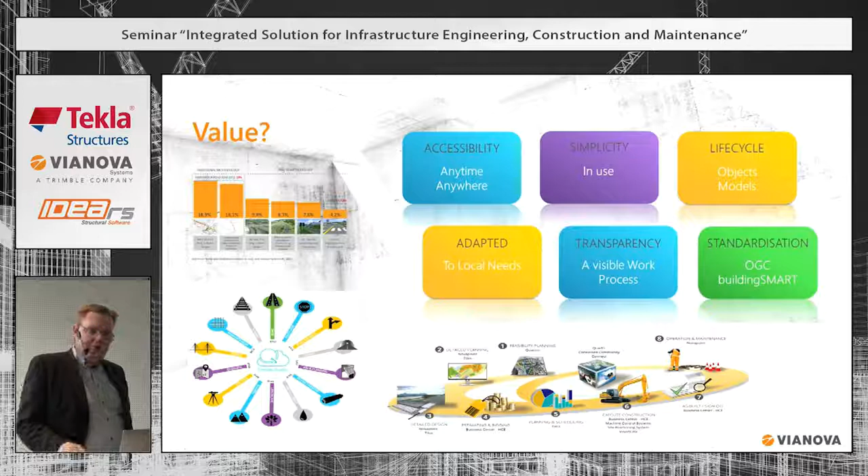And of course, the transparency, that's what we have discussed a lot. That has also been difficult in Finland, this transparency, because lots of work is based on hour rates. You buy hours per designer and that kind of thing. So if it's very transparent, then you are afraid that the customer uses that the wrong way. And of course, the standards and these kind of things.

So the BIM server and this collaboration platform, Trimble Quadri, is what we talk about today. What is good there is that when everybody is in the same model, you have this integrated process. So everybody has to do things the same way, with the same structure. And also all the terrain and GIS information is shared. So if someone finds out something or changes the terrain model, everybody gets the change. You don't have to copy and send files, for example.

And of course the design information. In big projects you have several designers, and you don't have to have these kind of windows where you put the drawings and check if those are clashing. You can do it in the model. It's more efficient that way. And of course, in the corner you have these common rules and regulations, requirements to make that happen.

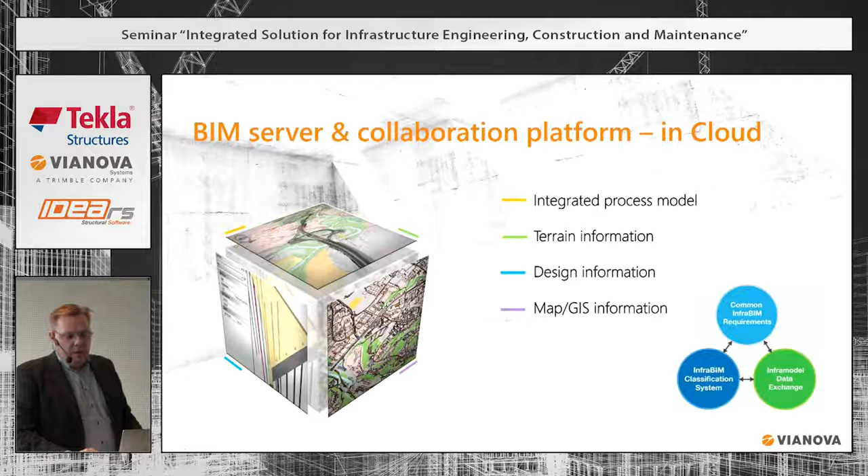But the most important thing, as you maybe remember from the beginning, is that we have this common documented way to do this. So we have these requirements and naming rules and regulations. And I took something from this website: planning a model-based project, you have to plan how to plan. So, sounds weird, but very easy to do.

And also this modeling extent and level of accuracy, because you have different types of information. You have this general information, large-scale maps and terrain models. Then you have very narrow and very detailed models, and to merge those, you have to know where it's coming from, who has done that, and what is the accuracy of that material.

And of course the goals. We don't do the modeling because it's cool or fun. Even if it's cool and fun, it's also cost efficient. That's the case here. And of course the process description, the actors, cooperation, the data exchange between actors and schedule. So every model or every object that you model, there has to be a reason and target and the schedule.

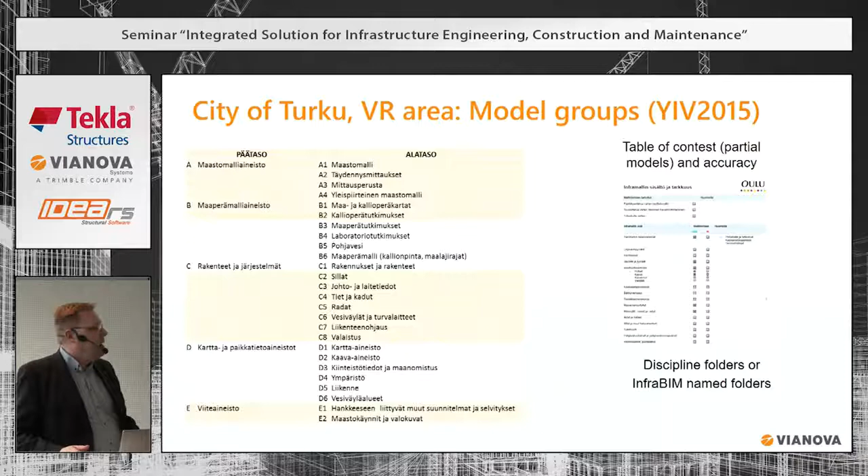Why do this? I'll try to make a demo now, and it's not as good as what Martin made, but hopefully you can see that. I have to change the screen. Okay.

So I have here a point base. It's connected to the Quadri database, which is cloud-based. Actually, I'm allowed to use only the viewer in our company. Martin can edit, but I don't have that kind of right anymore.

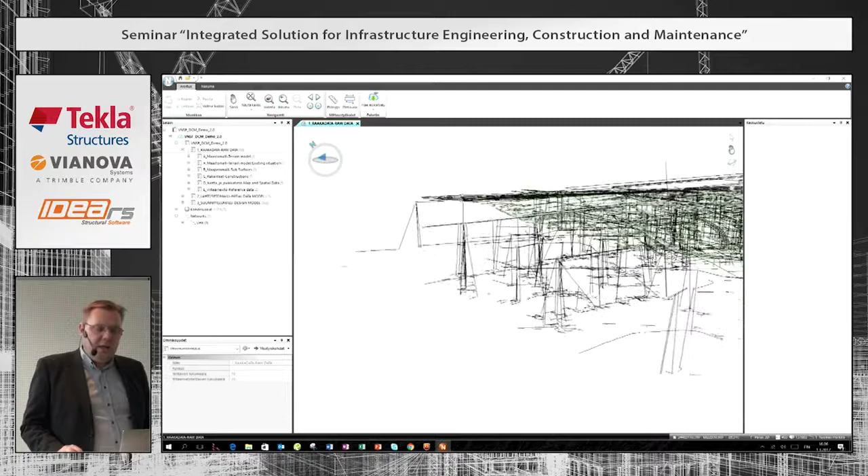As you see, it's quite the word what Martin said. So it's a lot of 2D, 3D material, and things like that. And this data is now on the server which is owned by the client. So the client collects the data they have. They can offer

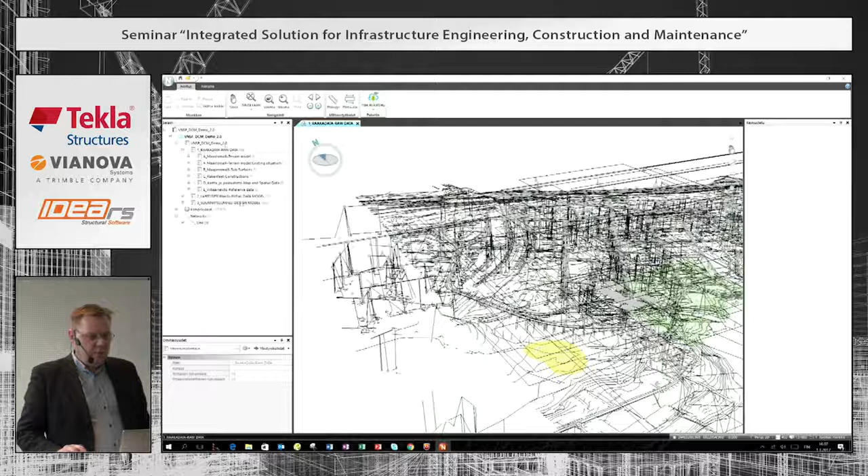someone to make an initial model. The initial model, you understand what this is. It's a base model where you clean all the 2D information and so on. So basically you share this information to all who are making a tender, and they are able to use the material to make an initial model. When it's clean, it looks like this.

So you have a city model where you have houses, you have boreholes, you have a city plan, and it looks a little bit nicer than this one. So it might be much easier to start design with this material. And in Finland many cities and also governmental maps are available, you are able to use those. So we can take also an orthophoto here, so it looks more detailed.

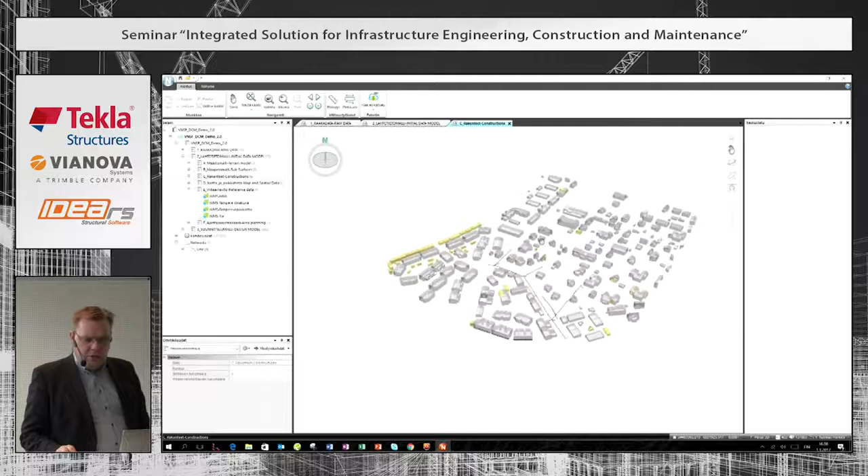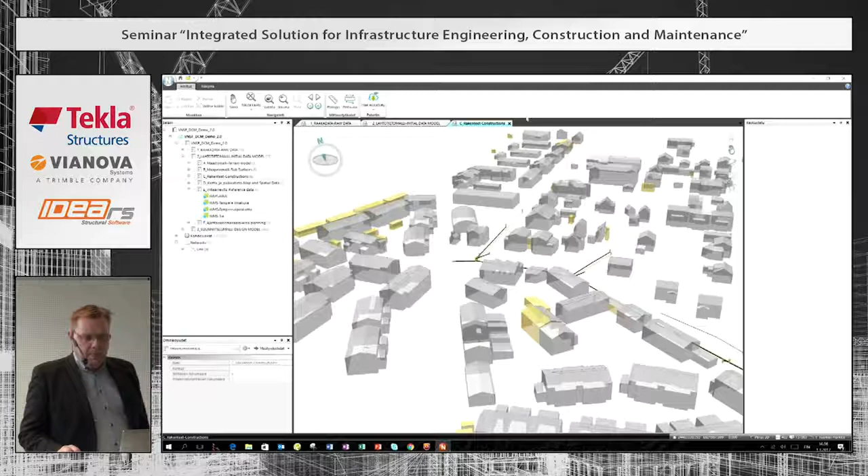So when you have the structure, it's very easy to show what you have. It's very easy to compare. If, for example, I want to see only structures and constructions, I can just open it and it shows that all the structural models are here. So you can piece by piece open the model and you can choose what you want to use.

And of course, now you have the initial model, you have some GIS information, and these are connected to the one model. Now you are able to share this data to designers, asking them to offer their design work. And then you can say that if you know there have to be some extra investigations, please include that in your offer. So you get better offers, and also if you are making the tender, you can take a print screen, for example, and show that there are some mistakes in the model.

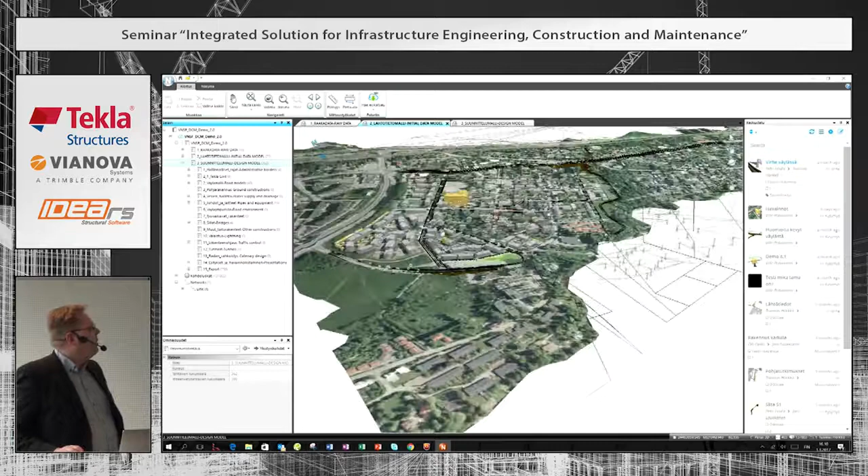If we go to the next phase, we take the design model, which is ready over here. As you see here, it's only design material. But of course you can also open this window where you have this data, and we just drag and drop the design model. So actually then you have quite a good visual model in there to show. So there are some mistakes. This is why I'm not able to edit anything anymore.

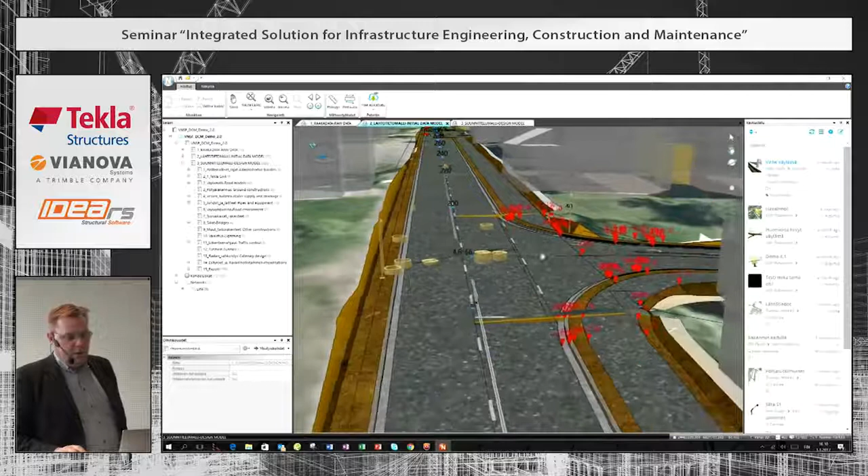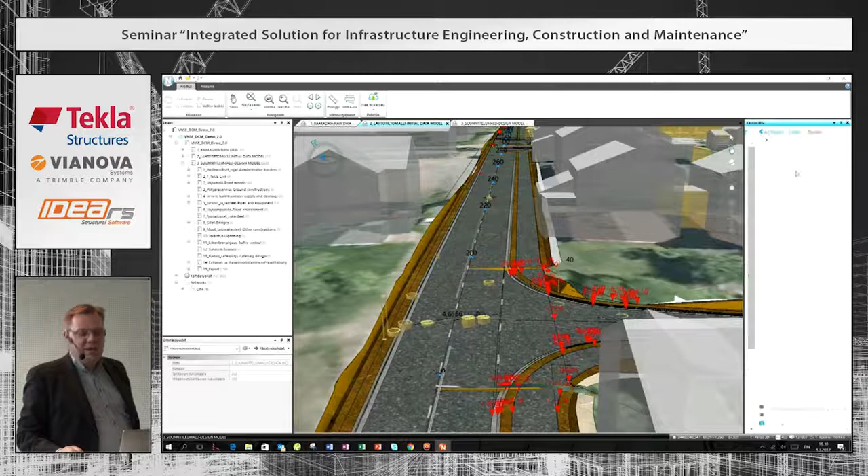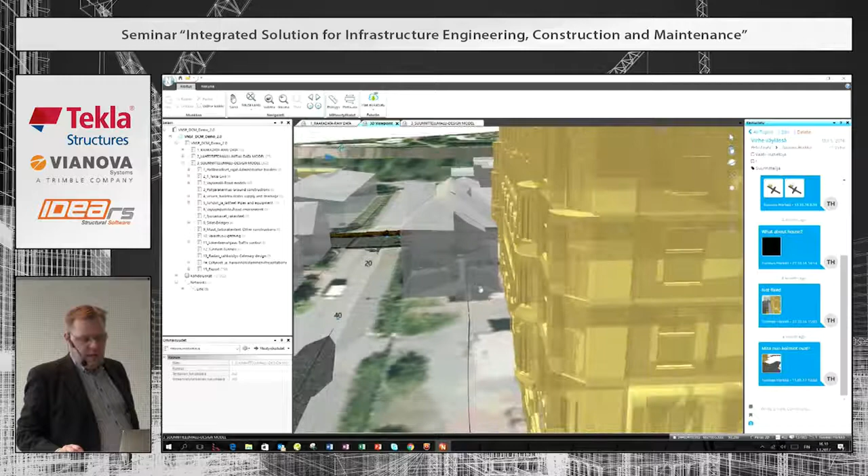So you can see that the process is very open, and if you now ask a tender from a contractor to build this project, the contractor can make his opinions and prices on these kinds of things. And on your right side, here is what we call Facebook for designers. So actually you can store data over here, if you want to see something, and you can give comments and that kind of thing. Commenting tool. Comments, yeah, tasks.

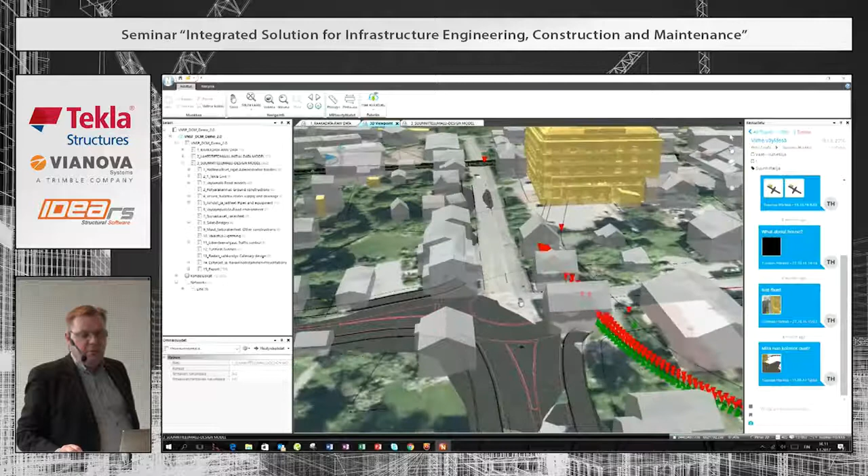But I must say that this roundabout Martin has done, I think you are also quite near to losing your user rights to this project.

But when we discussed how to get the IFC and LandXML in the same place, actually this model, this roundabout, and this building: this is an IFC model, this is LandXML from Tekla Civil, this is native Novapoint material, and as you see now, it's quite easy to go there. The only challenge maybe here is that this is LOD 4, so you have too much detail for a street designer. Actually, LOD 2 is good enough, so you have only the outer geometry. LOD is level of detail.

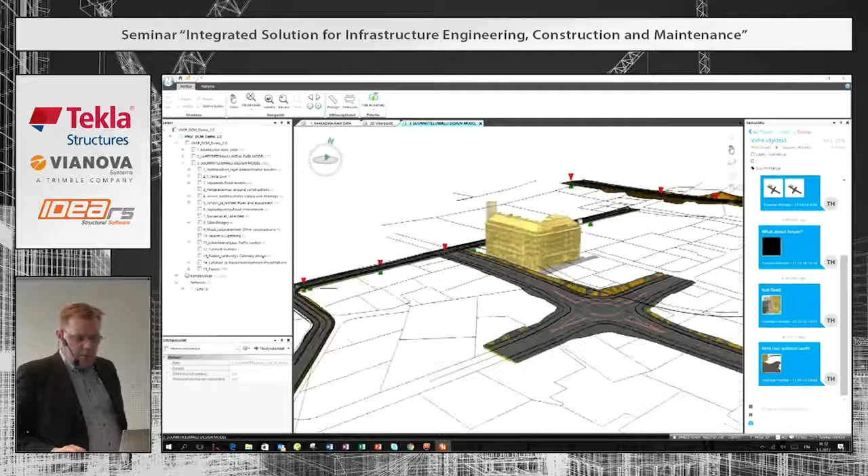So also you can have bridges over here. I shouldn't show this because you are bridge designers, but we don't build this. This is only for demo purposes. Don't worry. So you can add those also. This is done with Novapoint Bridge, which is just for sketching, not for real design.

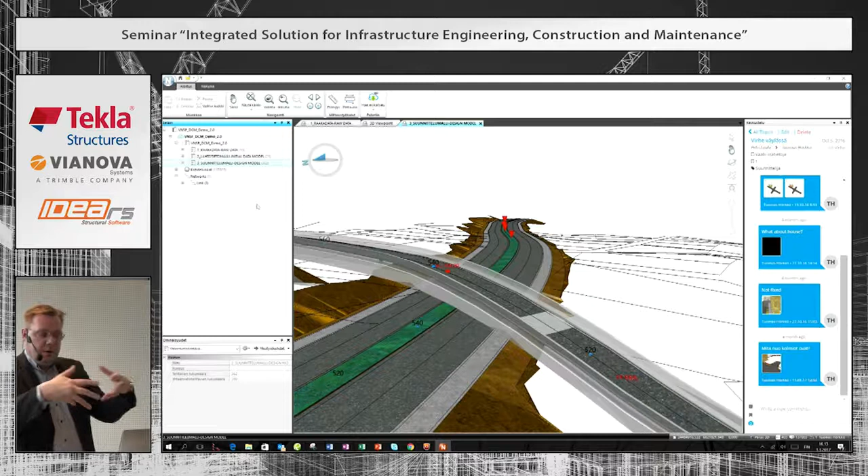For our customers, how they use this data: they use this database as a storage place. They use it for sharing the data between different designers or contractors. They are also able to ask for tenders so that the road or street designer makes their own offer, and the water and sewer designer makes their own offer. But those designers can use both data online all the time. So you can also split

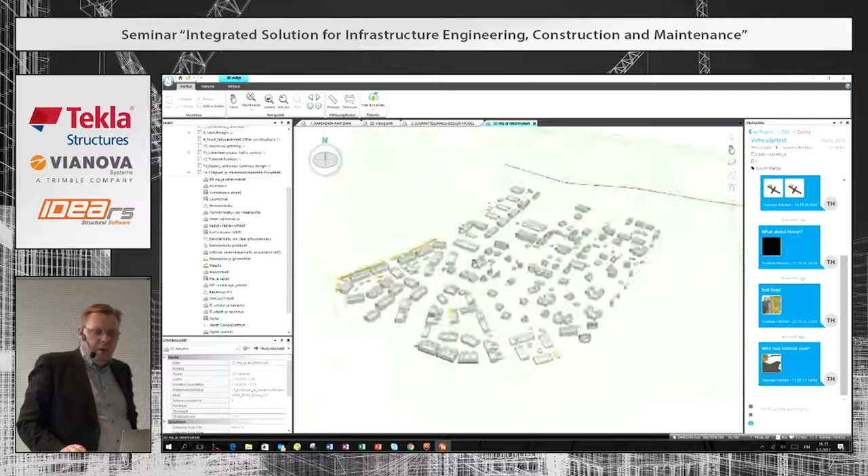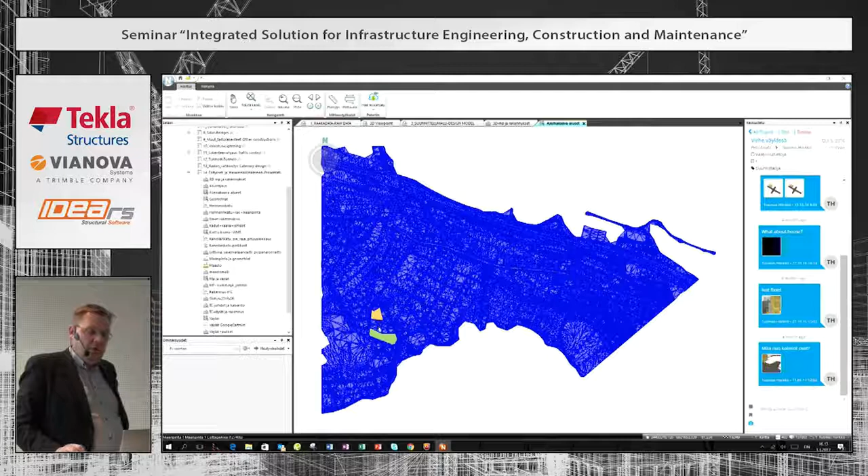in that sense. Also, we have presentations here, so you can make presentations that are ready-made. Normally when I make a demo, our guys make ready-made presentations for me, and I just show certain layouts, because it takes too much time to do it myself. But here you can see that if some design part is under discussion, for example this intersection, then you can just concentrate on that and make a presentation, and the designer and the client can have a discussion without meeting each other.

And also, you are able to do this in web. So we have this Connect, and then we have this easy access. The easy access is similar to Connect, so we prefer Connect in that sense, because then you can add richer data there, like Martin told, so you can put all the PDFs and Words and Excels and things like that. So it's like a project bank.

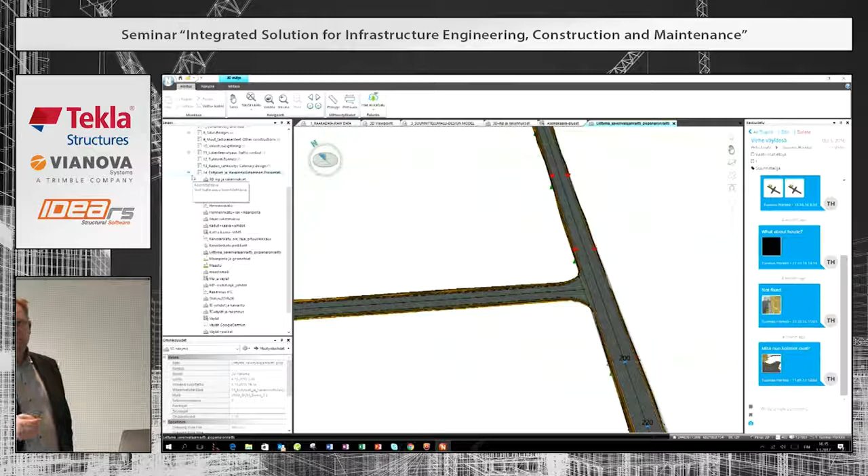And as Martin said, we have online and offline, so here also you are able to make it offline. So you can just grab it with you, and then you just click over here to ask, is there any new information? And then it connects to the server and searches all the changes since you last loaded the data.

This makes it possible to make a digitally fixed version. For the client, it's always important that when they give something out, it's the same version. All contractors have the same version when they calculate volumes, for example. So this helps that you can lock the version, for example, or deliver just the packages, which helps a lot.

Okay. Maybe the most important thing. Just to be more clear, this software is like a server of everything. Yes. Who is the owner of this software? What is your practice? Is it the road contractor or what? Yeah, the road administration or city or municipality has their own server.

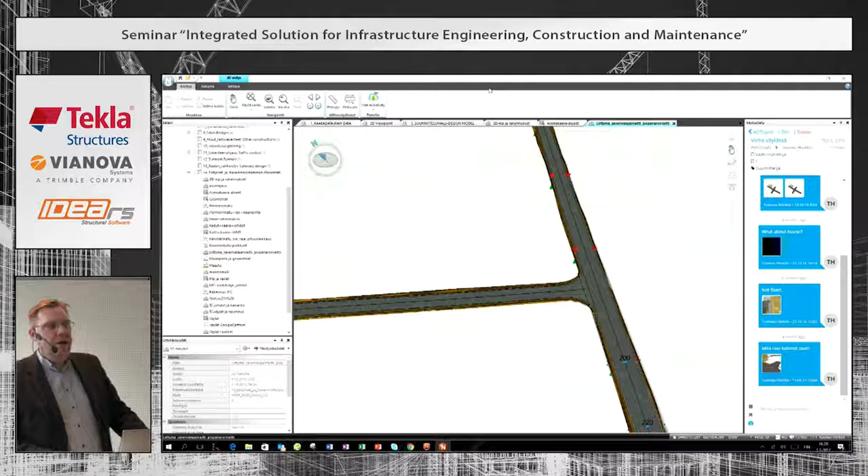Yeah, you're absolutely right. The data we do in infrastructure, for example water lines, sewers and electricity cables, is very sensitive information. It depends how these server areas are made. For example, what we always say to our customers: you are able to make a private cloud. So basically it's only in your own environment. And then we have this commercial cloud, which we, for example, offer. I can only speak about our company's services.